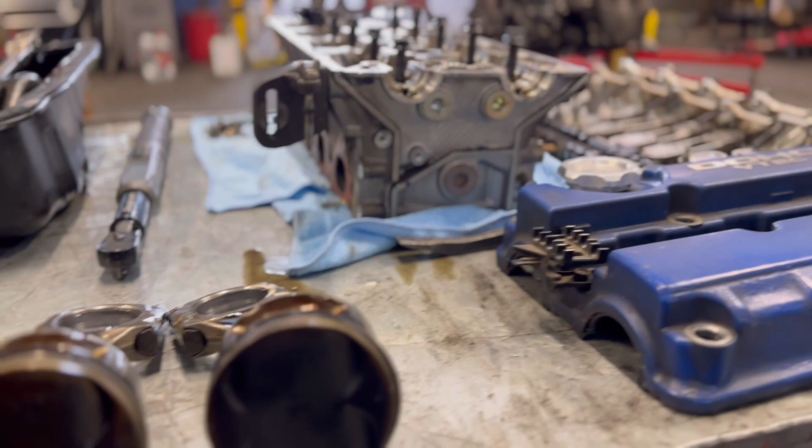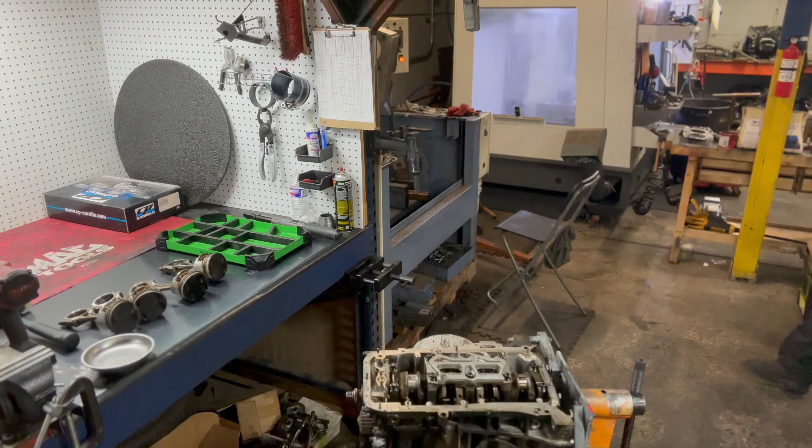Here you have it, the B18C1 GSR block with the unfortunate rod knock. It's here inside our engine build room. We're gonna spec it out, see what it needs, see what we can salvage, and move forward from there.

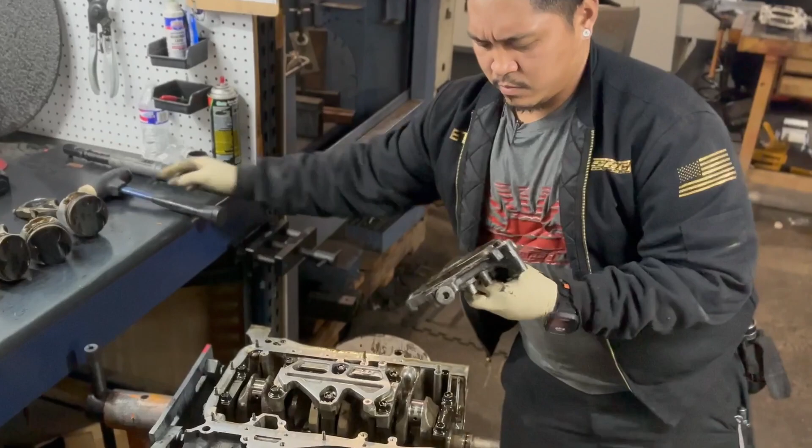We'll inspect the oil pump later, but honestly, it's feeling seized already. Should be able to turn the oil pump by hand coming out, but there's probably a lot of particulates already stuck in this thing. So we'll tear this apart and find out how it looks. Either way, we're gonna get a new one anyway.

Alright, I'm just gonna voice over here to avoid listening to myself grunt and moan over breaking these bolts loose. They are quite tight. But yeah, we use a Snap-on torque wrench in order to see how consistent these tightening sequences were from prior assembly. And so far, it all looks pretty consistent.

Whew. Smells spicy. Woo.

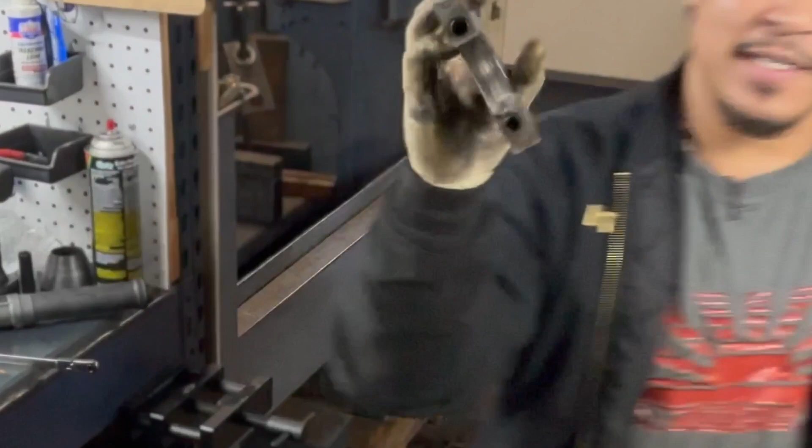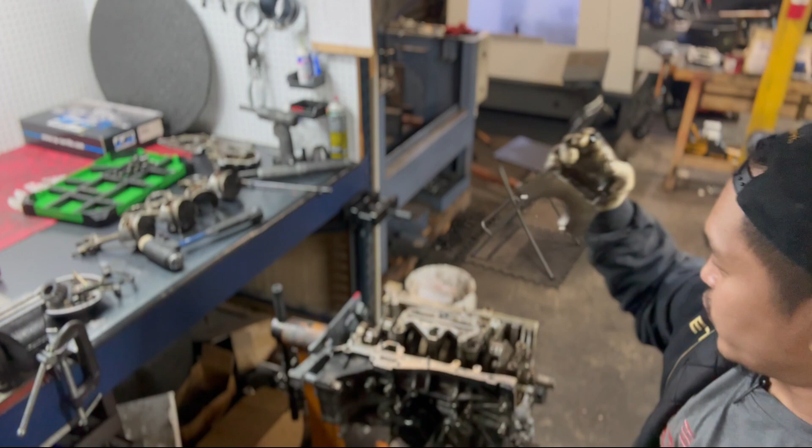Definitely particulate recirculation. You see a lot of pitting. A good amount of pitting in the bearing. You can see here that there's some scoring. So whenever you have contamination, or if your engine doesn't break in properly, you have a lot of particulate still recirculating. What happens is it goes in through the oil pump, and sometimes the oil filter doesn't catch it all because it's just so messy inside the rotating assembly.

It ends up lodging into these crevices and making its way into the main bearing journals and even the connecting rod bearing journals. And what that does, it creates a lot of contamination of hard, solid particulates, then creating some scoring, and really chews up the bearing, and then eventually chews up the crankshaft journals. This one's not so bad. You can see here. I'll show you up close and personal.

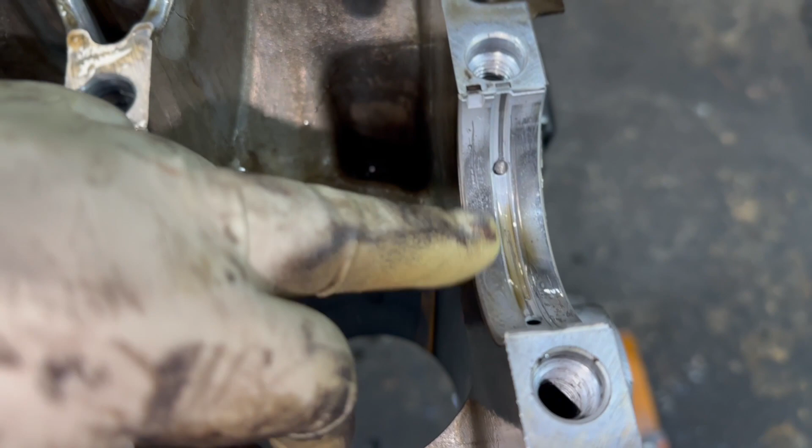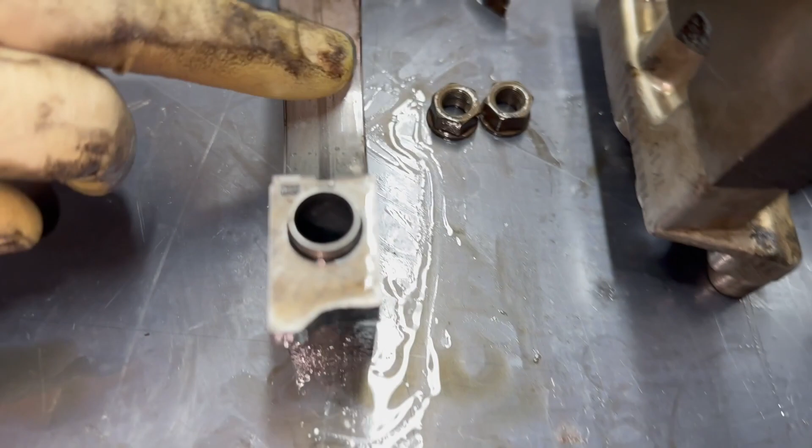Ooh, yep. Just as I thought. You can see here how there's some pitting inside the bearings. And then some actual rubbing on this main right here. But you can see even more on the main caps, where there's some hard scoring here. This is a big gouge right here, which is exposing the copper from beneath.

Definitely gouging from particulate contamination and recirculation. You can see that. So, yeah, definitely what it is, unfortunately, but this is where we're at.

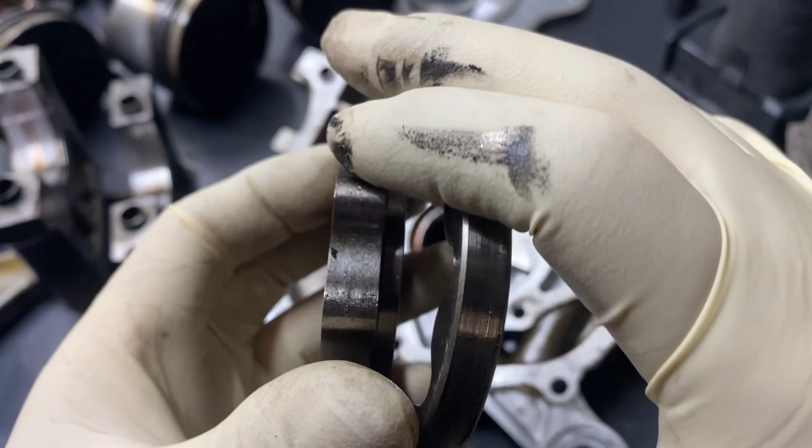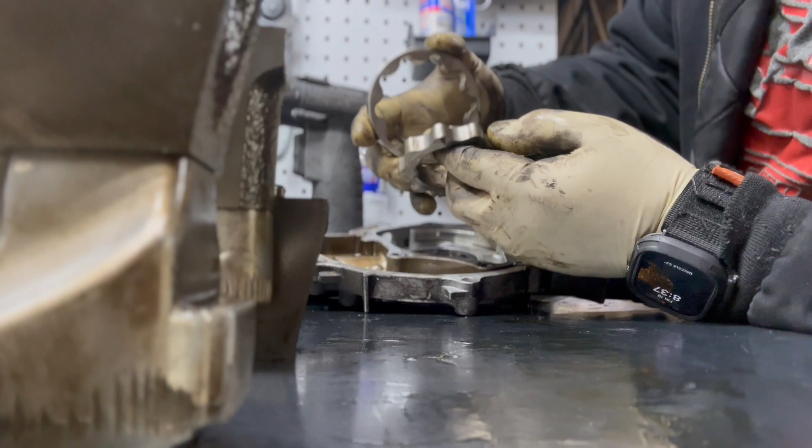Feels really grimy. And this is the particulate recirculation that I'm talking about. So whatever breaks loose inside the engine, there's only a screen that filters the oil right before the oil pump. It's not really an element filter for various reasons, but whenever things break loose and get chewed up, it'll just chew up the oil pump itself.

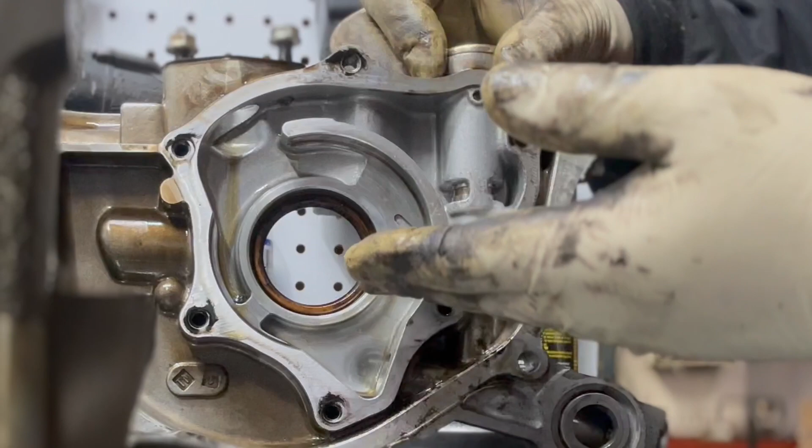And then what happens in some cases, it could get this relief valve stuck open because that little piece of metal will just lodge in there. Whenever it's relieving pressure, it'll open, but if there's a piece there, it won't allow it to shut to build pressure back up, and then cause bearing failure in the long run, or if not, immediately.

Some scoring here. Usually we would spec this out, but in this case, we're probably just gonna get a new one. And we're still gonna spec out the new one, but you can hear that grime. Really gritty. Should be a smooth oil pump here, but this is definitely not a smooth oil pump. Look at it, stuck.

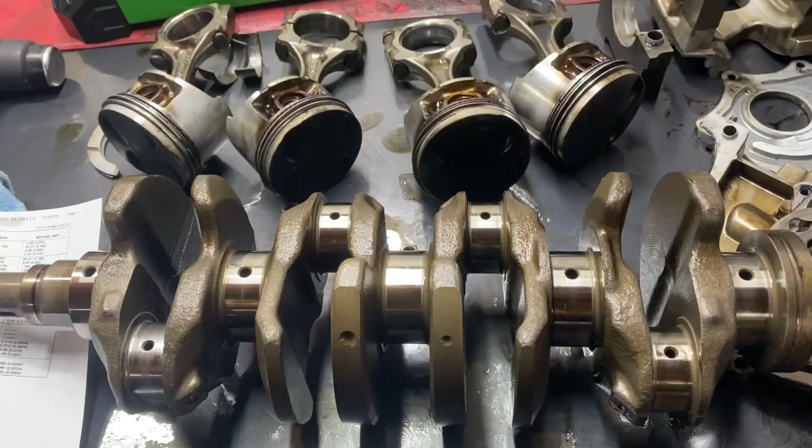As you see here, we're using a 1-inch standard for this micrometer. You're always gonna want to use a standard before using a mechanical micrometer. The standard will help you make sure that it's zeroed out and calibrated properly before measuring any parts. And you can see here that it's definitely calibrated properly with the two zeros lined up.

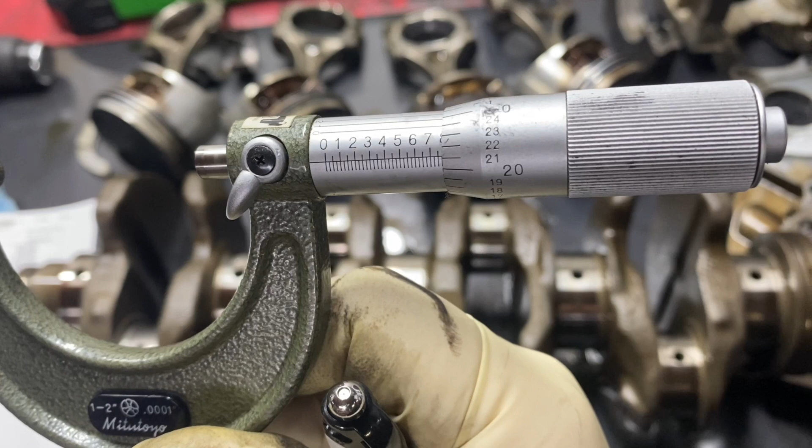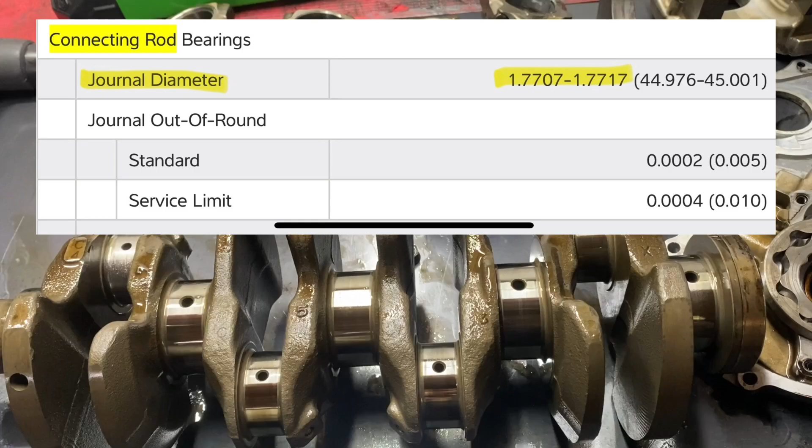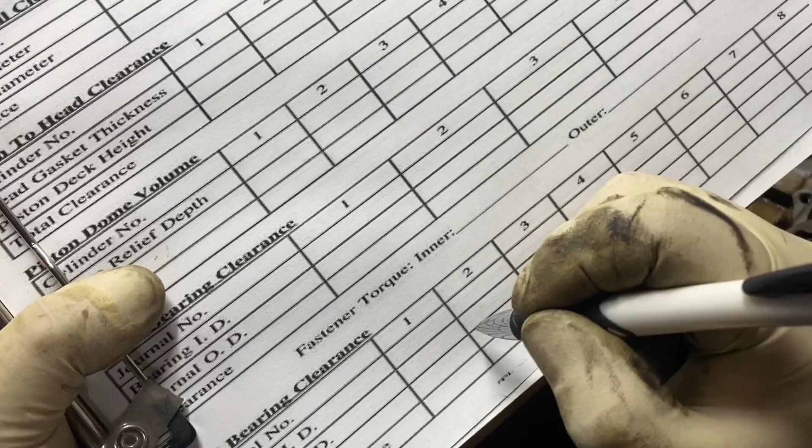So now that that's checked out, I usually mic my way down to the bad journal just to make sure that everything that seems to be good is actually within expected specification. Yep, this one sure looks well below spec. Clearly, it's quite obvious, but you still want to know where it's at so that we can see if it's even possible to salvage this crankshaft.

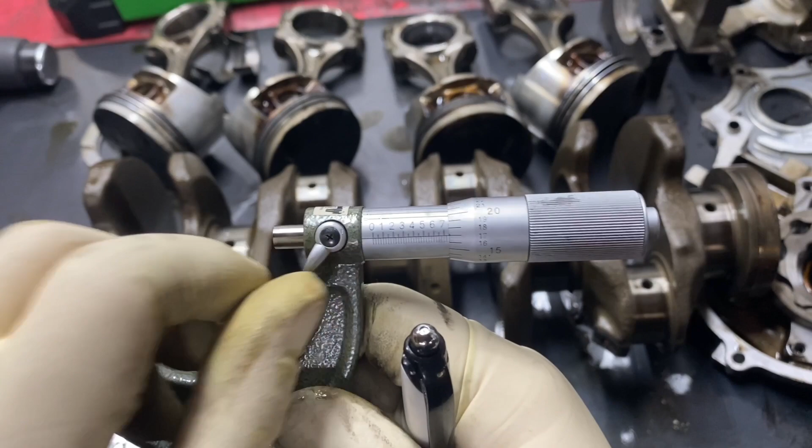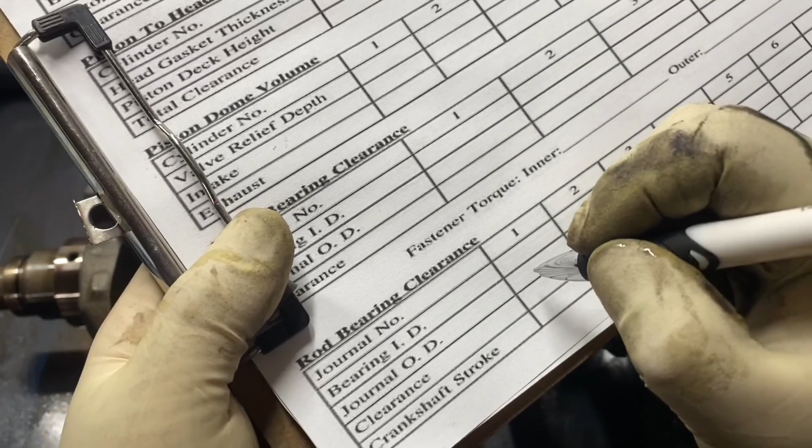Even if I were able to salvage this crankshaft, I'd probably avoid using it on this build since we plan on making some power out of it. On an engine that is spiritedly driven or performance oriented, I would avoid trying to save crankshafts because of how high they rev and how much abuse they get. I usually want to use a new or really good condition crankshaft after balancing and speccing out.

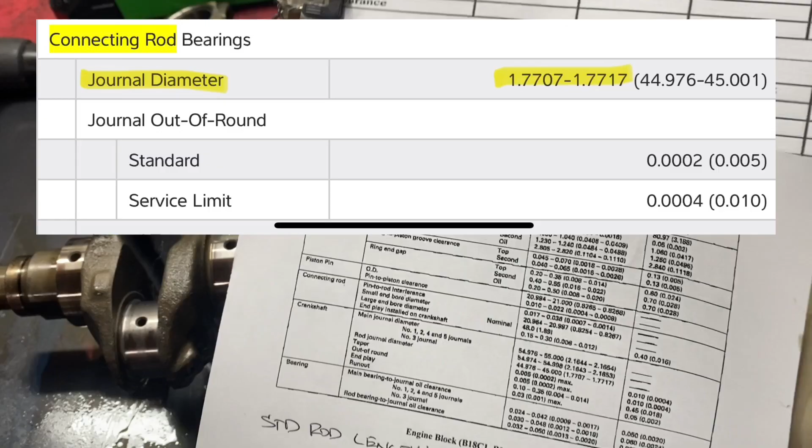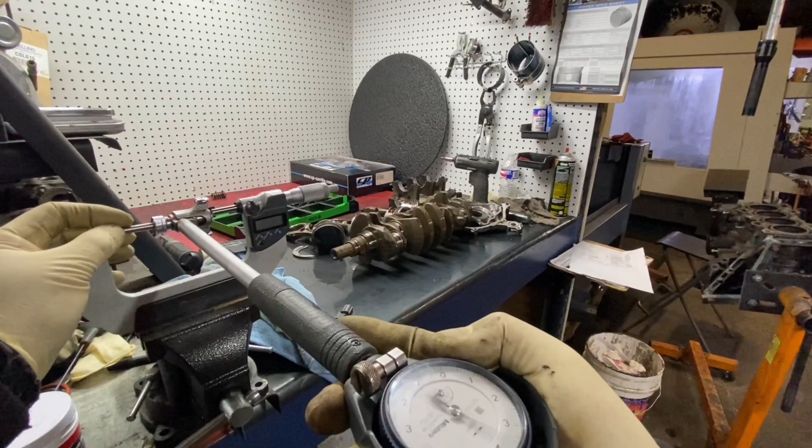Moving on to bore gauging. We have the micrometer set to 81 millimeters, or in other words, 3.189 inches. We use the bore gauge to set to 0 while it's fixed on the 3.189 inches. We're there right at 0. And then we're going to take it to the cylinder block and measure the difference between the 3.189 inches and where the block is at in order to determine how much wider we need to go with pistons.

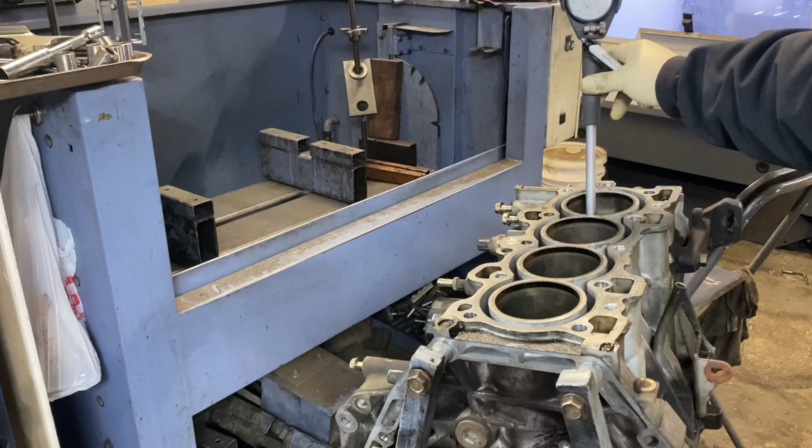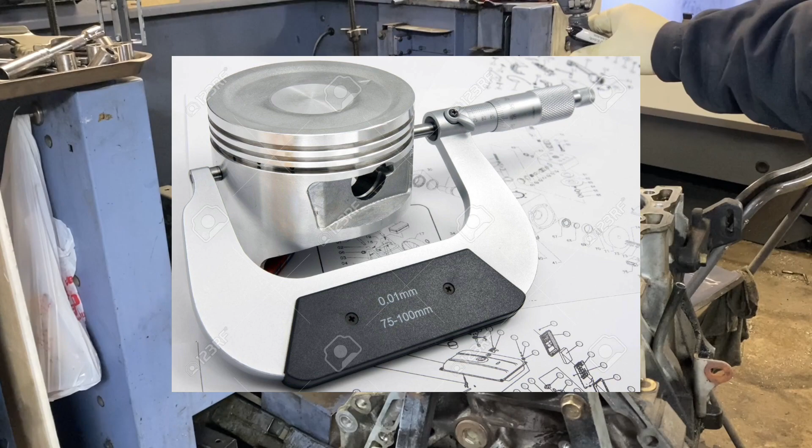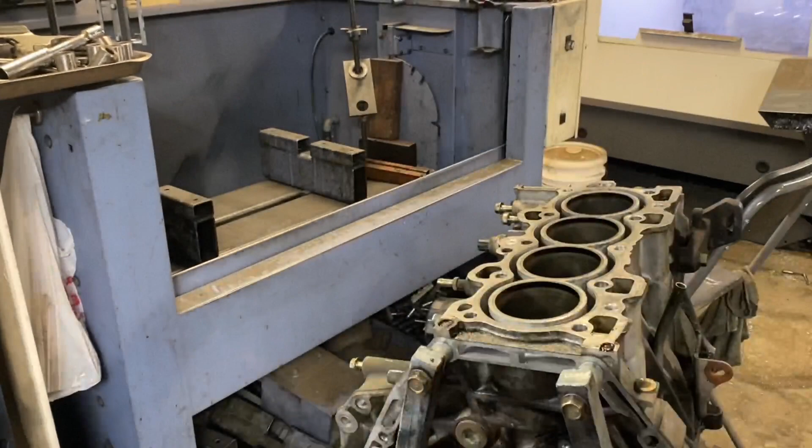Now, while prepping for assembly with new pistons, you're going to want to measure the piston's actual diameter in order to properly achieve piston-to-wall clearance. But in this case, I simply want to see how the cylinders look right now in order to judge what size pistons I'm going to run. And so far, it looks like we can go to the next step up, which is typically 10 thousandths or quarter millimeter oversized.

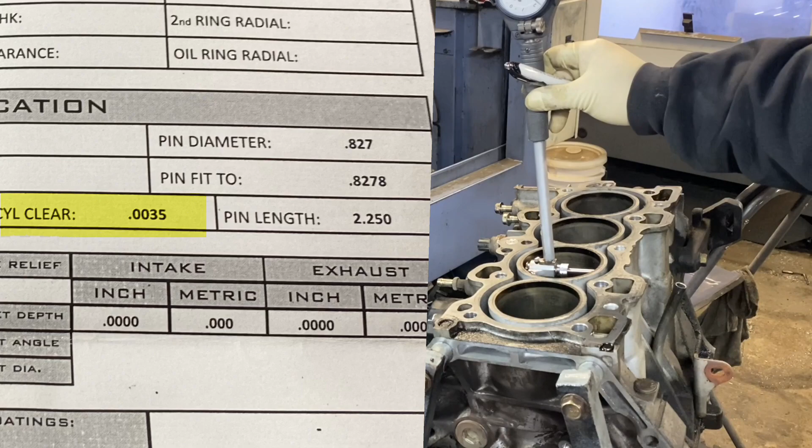The reason for going oversized is that currently the piston-to-wall clearance is reading about 2.5 thousandths, and we usually want to target 3.5 thousandths of an inch piston to wall. Oversized pistons give us a little more insurance to achieve a perfectly straight cylinder wall without running into any low spots. Now that we have all of our preliminary measurements, we can get the necessary parts. Then we'll move on to machining and then final assembly.